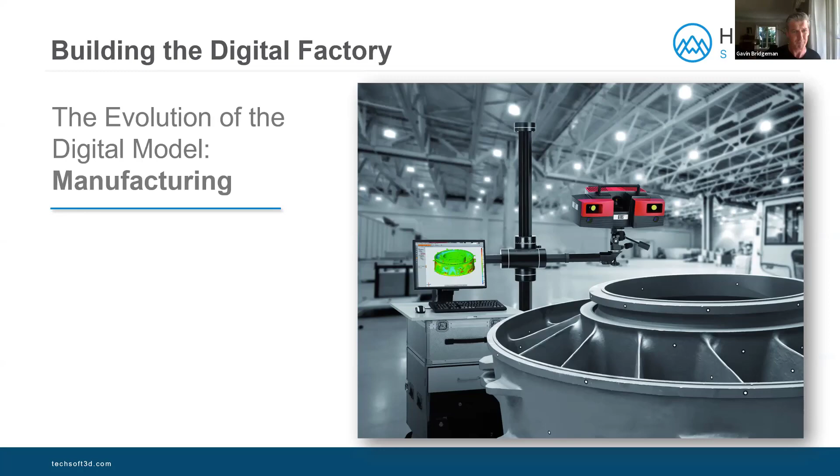If we look at that same trend in the construction space, it was the same idea. Initially, in the construction space, they really looked to engineering software to help facilitate design. It's a little different in the construction space, where in the manufacturing space you're generally pushing more and more towards automation, and you have less and less people involved in the creation of something, so there was a lot more software involved on the manufacturing side.

When you move over to construction, it's a little different, and that's really where a lot of the savings is, because by and large you have people on construction sites building buildings. So a lot of the opportunity seen in the construction space was around quantity takeoff applications, scheduling software, and there was huge cost savings enabled by having a digital model, which required a further investment in the amount of information they put into their digital model.

And we're going to have Luli Lee talk a little about what Fieldwire does, and she'll show you an application that is exactly designed at that, reducing costs by leveraging the digital assets.

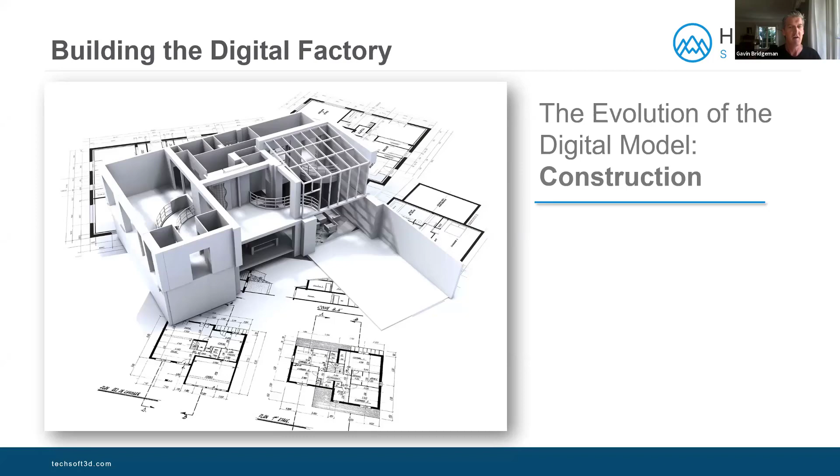So I think as we look at those two markets and the evolution of them and the opportunity that's being created by an investment in the digital model, we believe the digital factory is the next frontier on that front, and that there is massive opportunity for our community within this digital factory.

So I want to start off by defining what the digital factory is, and then I'm going to talk about a couple of the challenges in this space, some of which are problems that we're trying to solve, and some of which are ultimately up for our industry to solve.

What the digital factory is really about is, first of all, we have these digital assets, and your building is designed in Revit, and these industrial machines that live within the factory are designed in typically an industrial design application like SolidWorks or NX or CATIA, and it's about bringing those things together.

Then it's about connecting IoT devices that can bring those things alive, and then you have that data augmented with other information. Some of it can be 3D scanning information, some of it can be inventory information, and it's about all this digital information coming together to create an intelligent factory.

As data moves into the digital domain, it opens that data up to the power of algorithms, the scalability of computing, and that's where the real opportunity starts arising. So as this domain gets fully digitized, there's massive opportunity being created.

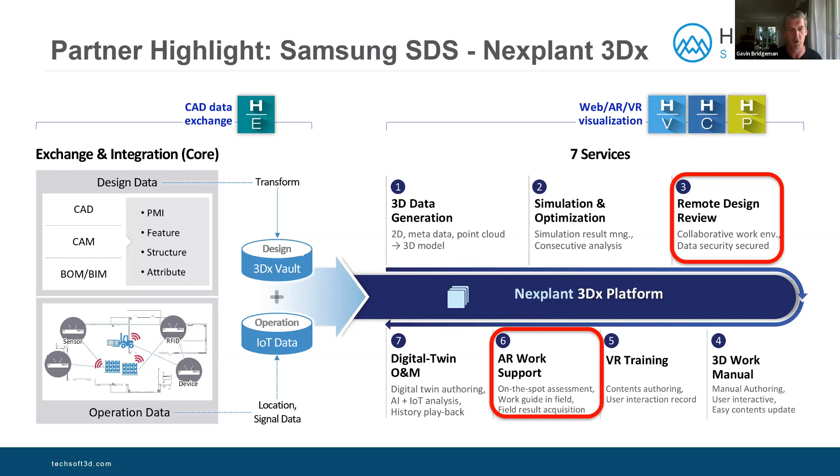There are some real challenges around how you can solve alignment issues and have a digital asset be put into the physical world and have it line up correctly. So those have been two of the interesting parts of working on that project, and it's a really exciting project for us as a company, and certainly has fueled a lot of our insights and excitement around this area.

So I'm going to highlight, since this is a topical discussion, two of the main areas we see as the difficult problems when we talk about the digital factory. The first one is just creating your digital factory. Just creating a 3D model that brings together construction data and manufacturing data comes with its challenges.

The great thing is that because of the investments the construction and manufacturing world have been making, they've solved a lot of the problems of having 3D representations of their models. They have every part modeled down to an individual case. You can't do a quantity takeoff application if you don't have every door and every window modeled. You can't build a digital twin if you don't have your industrial machines with the ability to connect to IoT sensors. So being able to bring this existing work that both the construction and manufacturing world have invested in their 3D models enables this to happen.

But still you do have these disparate worlds. The manufacturing and construction worlds tend to be independent worlds, and while there's a lot of similarities in the data, bringing those two things together presents its own challenges. That's why in the last two to three years, historically we've always had a strong set of technology around bringing in manufacturing data.

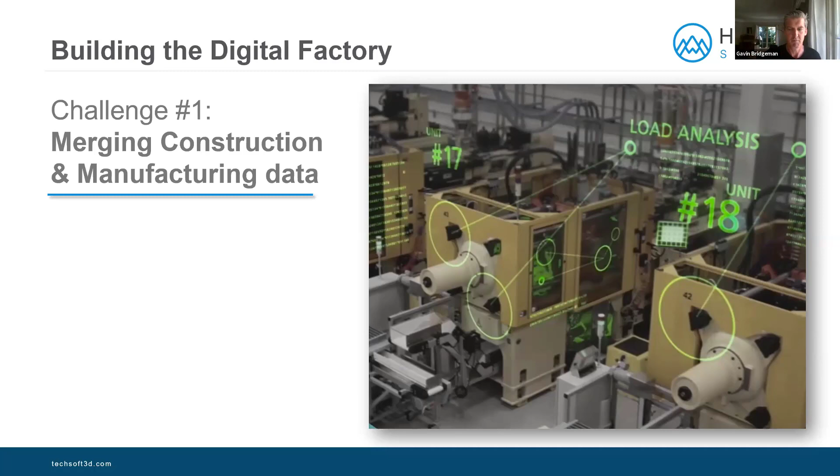The second thing I wanted to talk about, and I was trying to think of how I would describe this series of challenges, the best I could do was talk about this idea of getting from a dream to reality with these new technologies.

What I mean by that is, let's take for example IoT. This concept of having sensors on devices and wirelessly transmitting back information in a secure way to a centralized location is incredible, and the truth is that's the reality today. That does happen. So you have the digital twin that exists today and has been in use in the industry today. The challenge there involves connecting the IoT device back to the digital asset.

Sometimes that's easy when it's simply a location, and that might be the case for temperature sensors or these kinds of sensors in a digital factory. When you get to a specific sensor attached to a particular device that maybe has movement attached to it, that can be a little complicated, and that requires you to connect into the engineering model at a low level. The nice thing about working with engineering data is that you have that granularity where you can make that connection. So from an IoT perspective, actually bringing the factory to life is not a difficult thing to do. If you have the digital factory, it's fairly easy to connect IoT data to your devices, and we work with many partners that do that today.

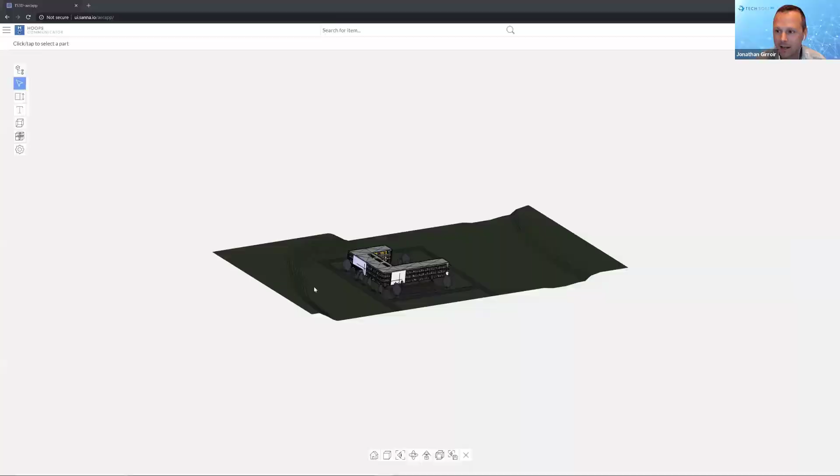I'm going to hand things over to Jonathan now, and he'll show some demonstrations of this technology in action. Great, thanks Gavin. So let's take a look at this and how we're enabling these types of workflows using our technology.

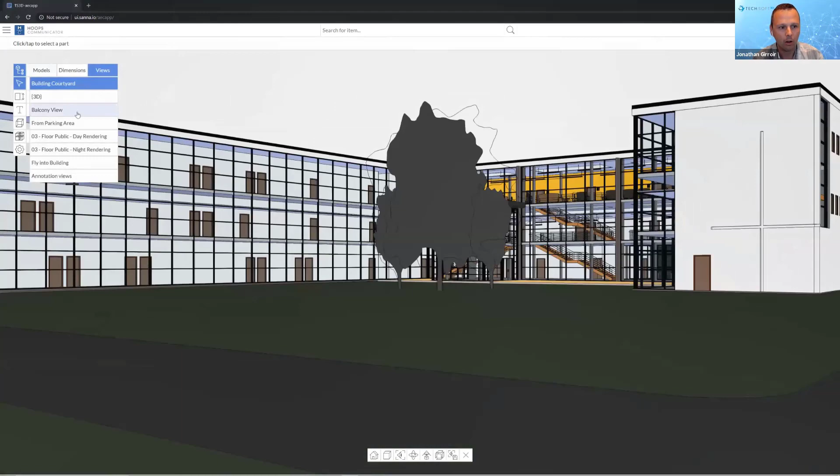Hoops Exchange here has brought in some CAD data from a Revit file. We're able to visualize it now in a thin web viewer using Hoops Communicator. All the views that were originally in that Revit file can be enabled here. You can create custom views using Hoops Communicator.

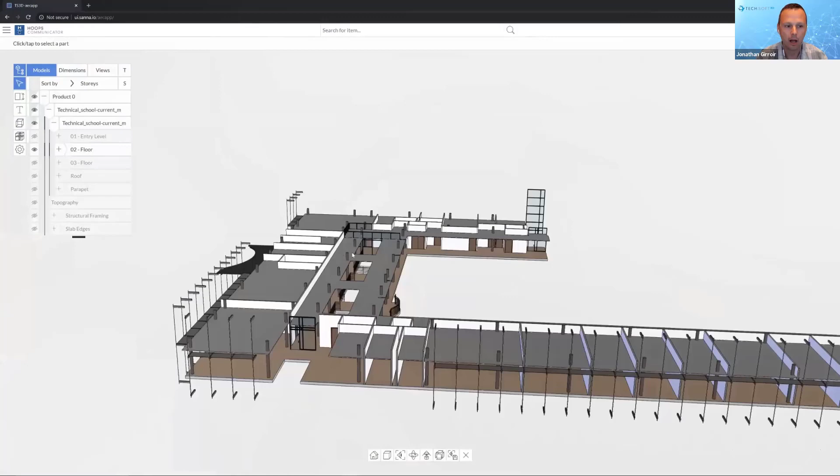But what we want to showcase is not just our ability to bring in CAD data, but link it with other types of frameworks or databases. So this is showing you how to slice and dice data. All of the data has been pre-processed using a BIM connector engine from Sanna.io, one of our partners and a component provider as well. So I can view this by floor.

We just saw the second floor, or by category, which is a paradigm here in construction data. I can turn off everything and turn on, let's say, walls, the curtain panels, and structural columns. So depending on how my data is organized, I can now change the 3D view.

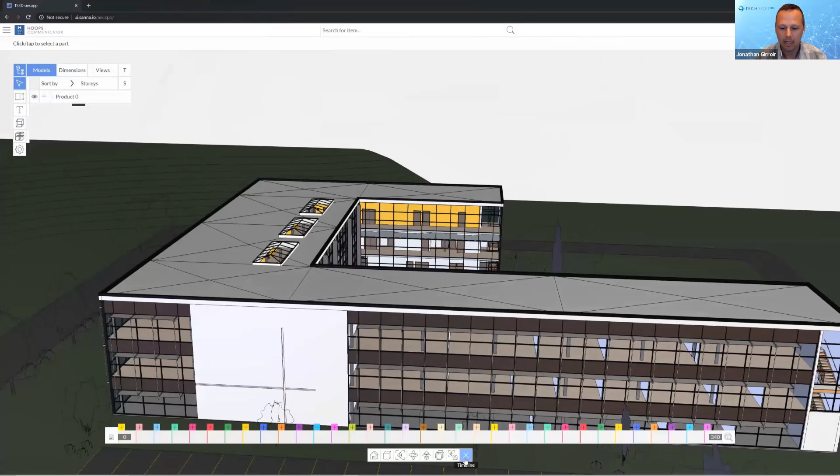We're going to go back to our floor view, and another way we can overlay additional data is through, let's say, a construction timeline. So here, starting from day 0, I can go to different snapshots of how this is going to be built over time, and again, enact or show what's happening in 3D and what I should expect at those particular milestones.

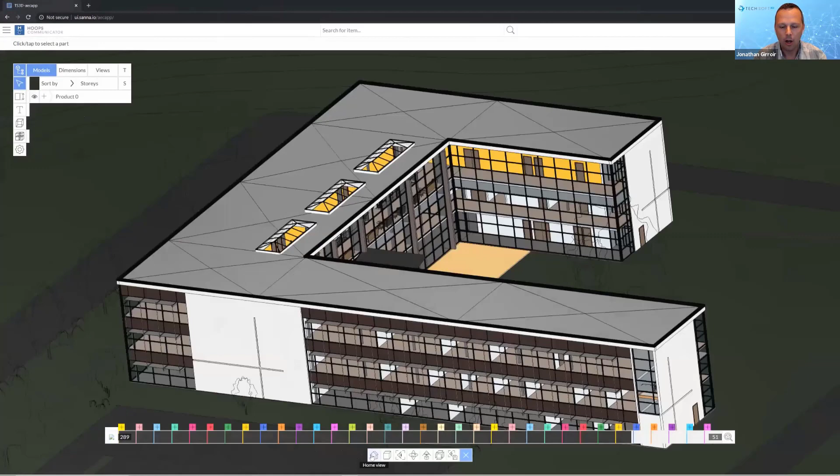Another very challenging problem that Sanna has solved, or is working on, is connecting 3D data with 2D data. So here we have really a federated model. We've been able to read in the DWG data for the floors as well as a 2D plan, like Gavin was talking about, and connect it together.

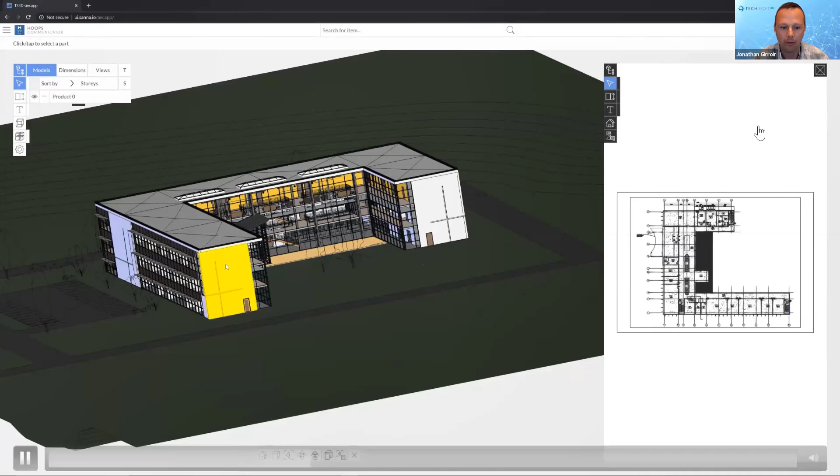And Sanna has gone through and organized this data and created a data backend that allows me to do things like link together selection of a wall in 3D and the wall in 2D, or this shade support in 2D, and be able to display it here in 3D. And that's not an easy problem to solve. So being able to show this is really exciting.

There's also a federated search. So bringing all of this data together and additional data, we can now search for things like, let's say, walls. And we have different suggestions as well. We're searching in the category section, but we can show, let's say, all the walls on the first floor.

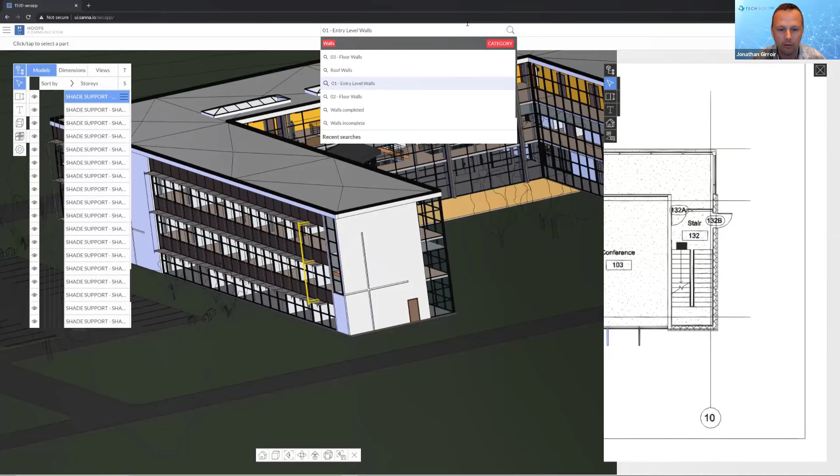And that gives us a list that we can now step through and again, be able to display it not just in 3D, but in 2D, and have it zoom exactly to that location, and be able to display it up here in the model browser as well as we walk through each of those elements. And so now we're overlaying a data model on top of your 3D and your 2D data.

We can do some very interesting things like search, in this case, for doors, but maybe I'm not interested in the categories - this data can also be organized by family. What's really interesting is there's no door text in the object name, but the Sanna BIM connector has allowed us to classify objects in this family and recognize they're doors, enabling this intelligent search mechanism.

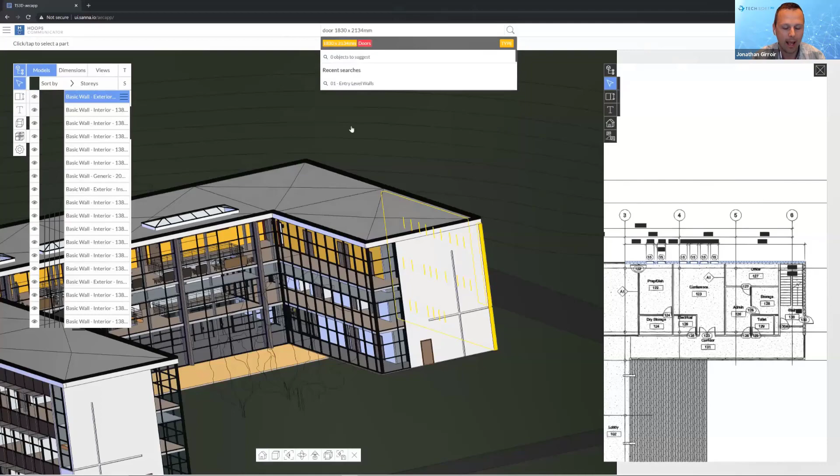Again, we can change the way our 3D data is displayed with these filters. That's Hoops Communicator being able to do that in a graphical way, and Hoops Exchange providing all of this data for visualization.

So here's some classic building and construction data, being able to walk you through different views and bring it all together. It's all being skinned in a custom UI - that's something up to you. We don't enforce any specific UI. What we do is provide you with all the data and this 3D and 2D rendering.

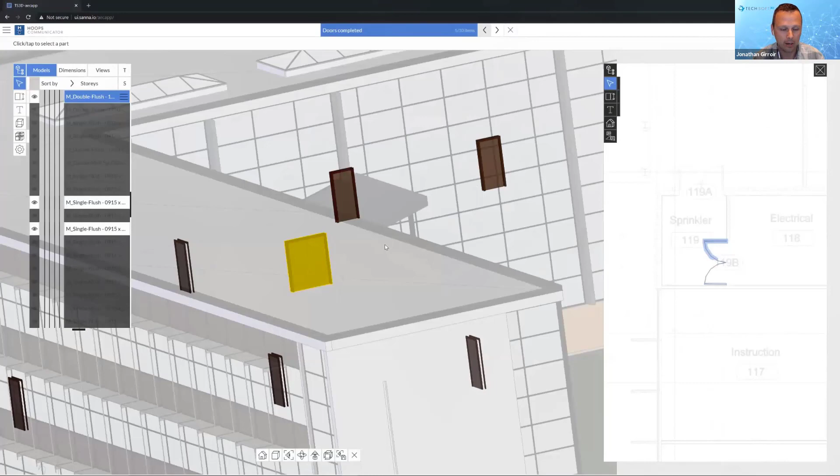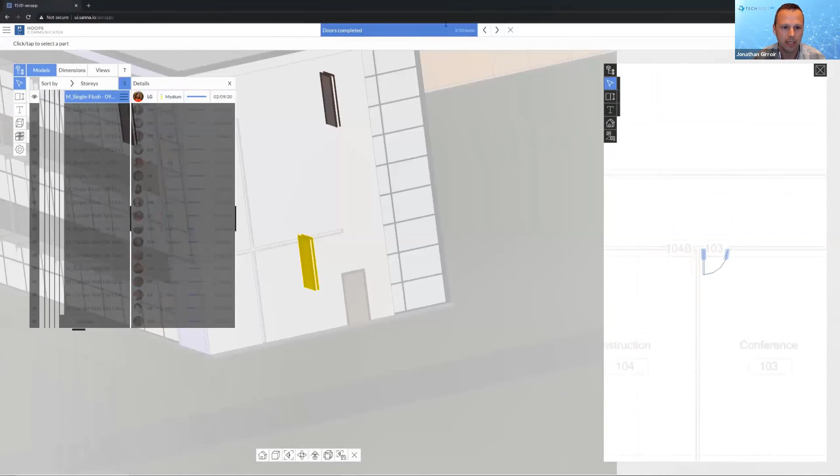We can do other things like look at priority, or the owner of particular objects, look at different Gantt charts, or what's been completed as part of this project at a particular time point, or who owns a particular set of objects, and filter that way. So just a lot of different views into your 3D data, giving you more than just a dumb model, but being able to navigate it in all these different ways.

The next thing we want to show is - maybe Gavin, you can move on to the next one.

You mentioned bringing a factory to life, and so here's a demo looking at a dashboard for a fictitious digital factory, bringing in IoT data, consumption, energy consumption, as well as environmental information about humidity and temperature in the factory. But what we really want to do is bring this to life using 3D data.

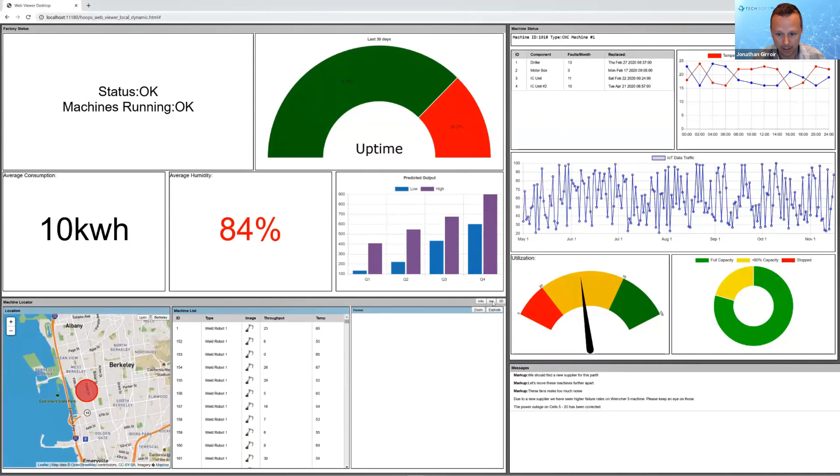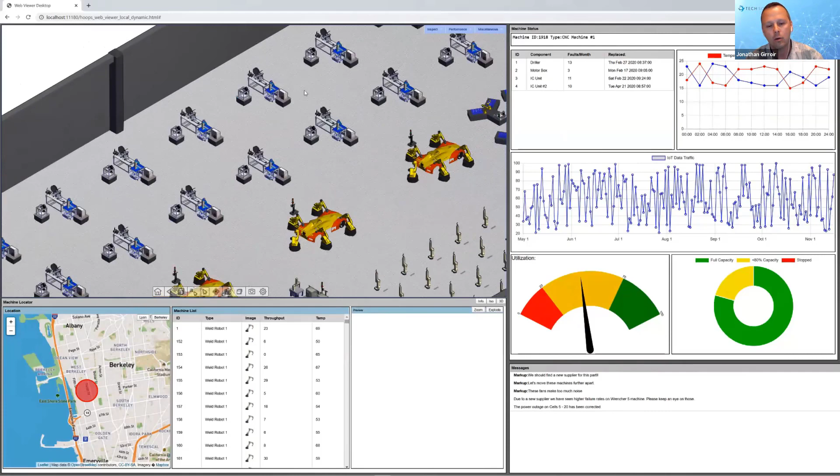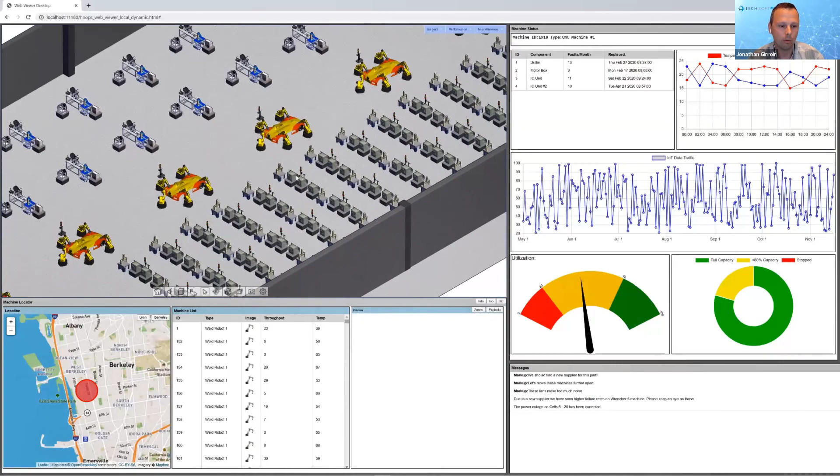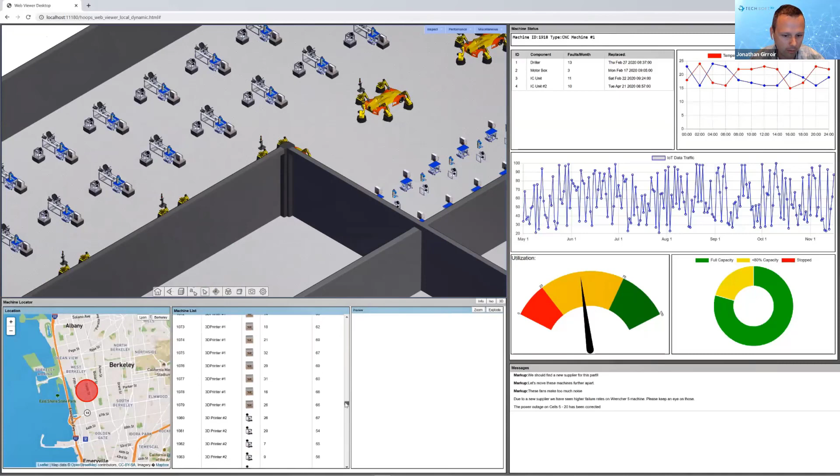We have a list of all our couple hundred different robots, tools and machines in this space, and we can go to that in our list and zoom into the 3D factory where that's located. In fact, we've also added animation to that.

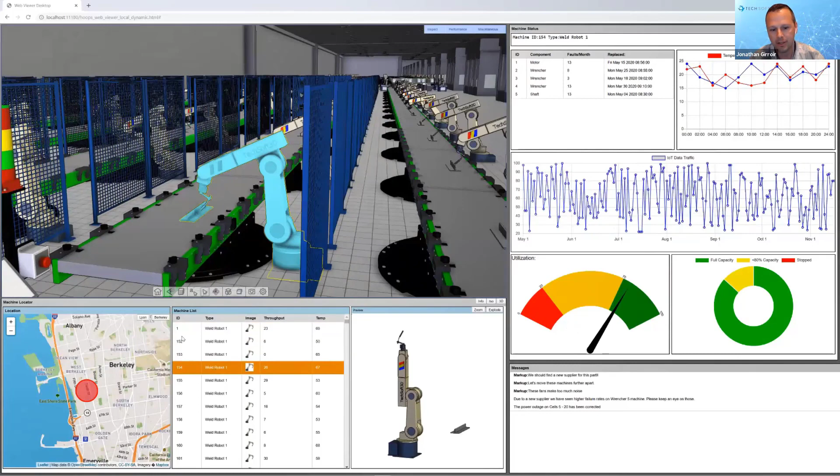This is something we're working on across all our visualization products - adding animation. We can step through each of these different machines and walk down the line, or blow it up and look at our full 3D view, because that's what we might be interested in.

But again, we want to bring this to life, so we want to overlay additional information. Let's say we want to showcase all the problematic machines - which of these have a significant amount of downtime or fault errors, and can I see that in 3D?

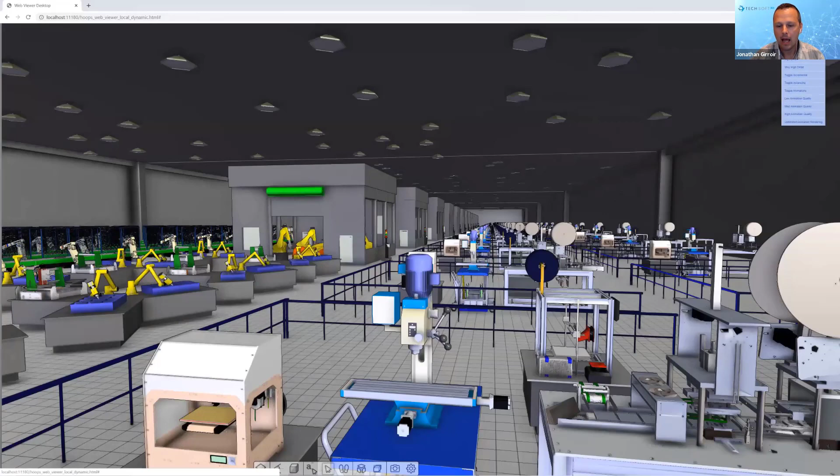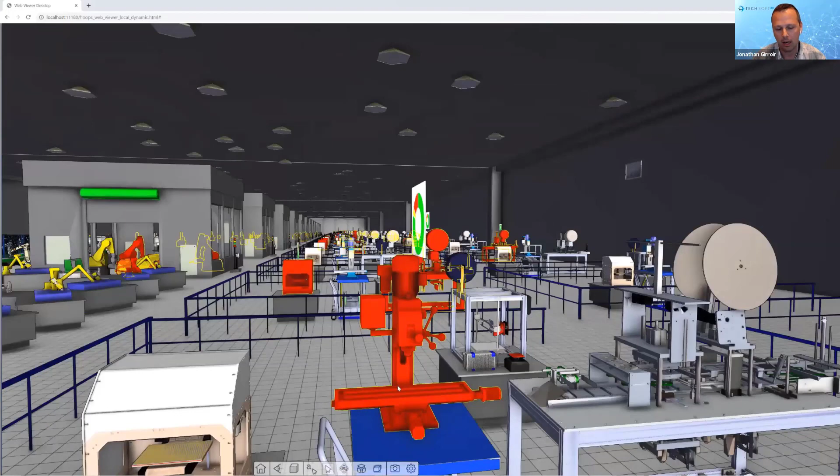The next thing you'll see is our ability to show problem machines, all highlighted here in our 3D view, soon populating with little icons or charts above each machine showing exactly what's going on at a quick glance. I can troubleshoot that, procure maintenance records, or load that 3D model to troubleshoot it as well.

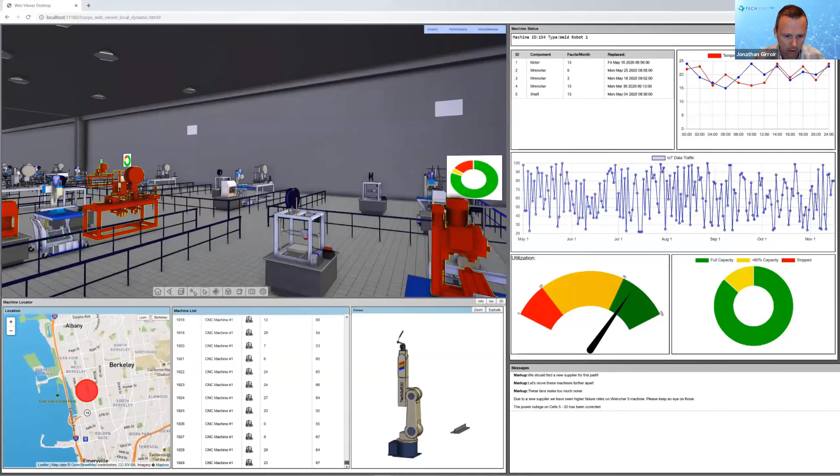So let's exit our 3D view and look at a few other things. We're going to go down our list of machines and bring up a CNC machine. You'll notice we zoom into our 3D view, but also here in our preview, we bring in the entire 3D model.

We've done a number of performance tuning efforts to load low fidelity models in the main factory and high fidelity models here in the preview, pushing them back and forth as well. So if I want to troubleshoot in the main 3D model, I can do that by loading the entire model.

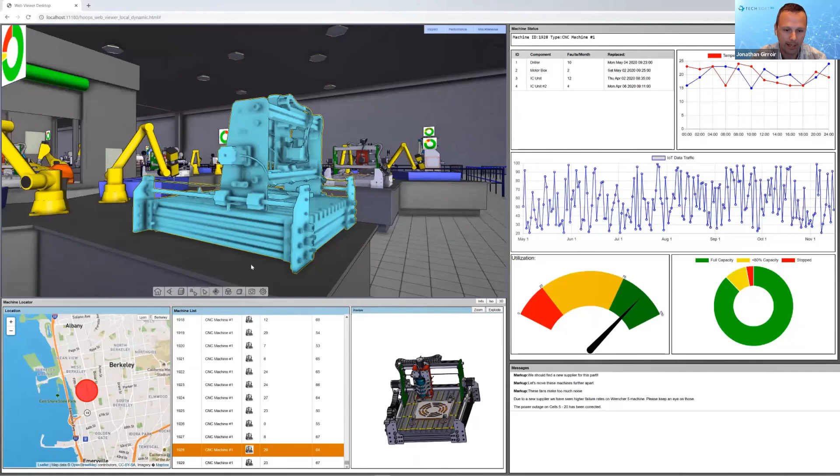Because we have the whole mechanical assembly, we have a bill of materials, or a filtered bill of materials, up here on the right. Each of the units that may be attached to some IoT sensor providing information, we can present that in our preview view.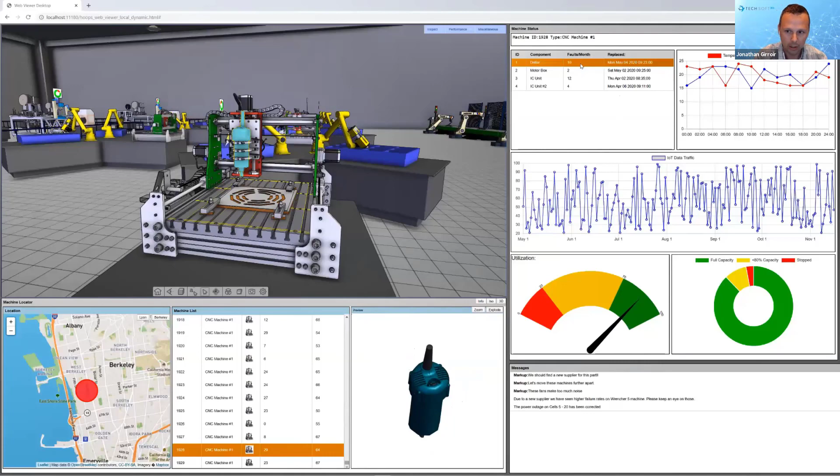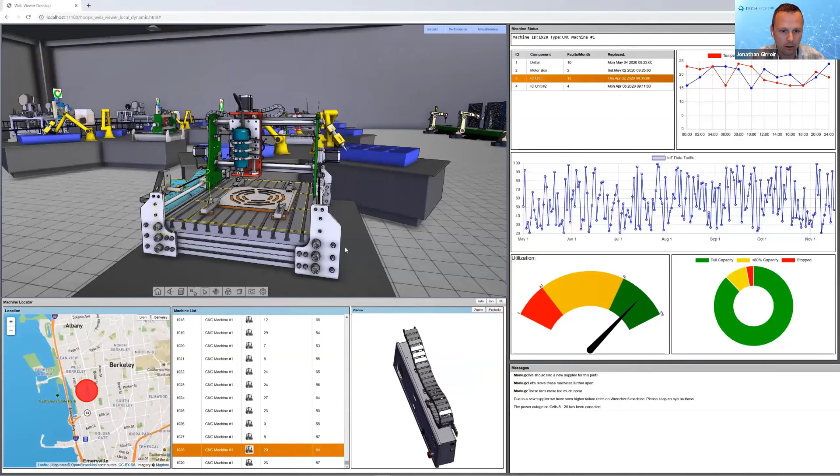Let's say this drill or the motor, we can now bring in additional information from, let's say, the number of faults or when it was last replaced, and further drill down into this data-rich model, both 3D and IoT data or data from a database.

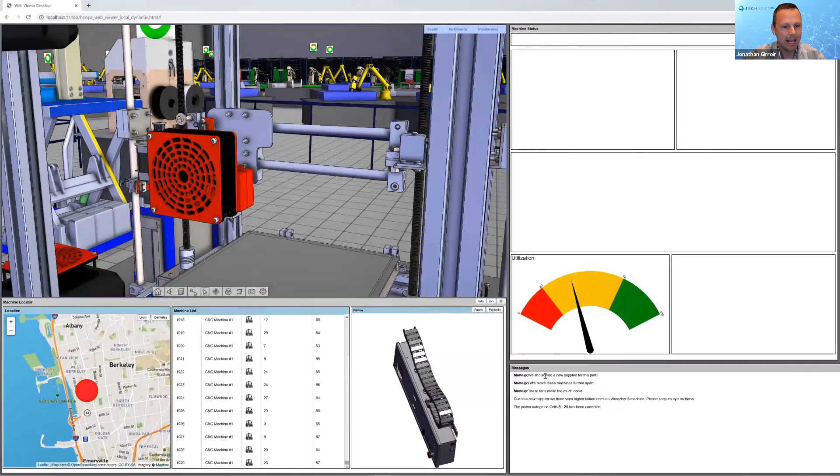Another thing we might want to do is walk through different messages that technicians have annotated. So here we're looking at a machine. We need to find a different supplier for this part. We're going to load the full machine to get our full context, and again this is modeled down to the individual panel or individual bolt with high fidelity information. So we're able to switch between fast animation and walking through this factory to really drilling down and getting these rich 3D models.

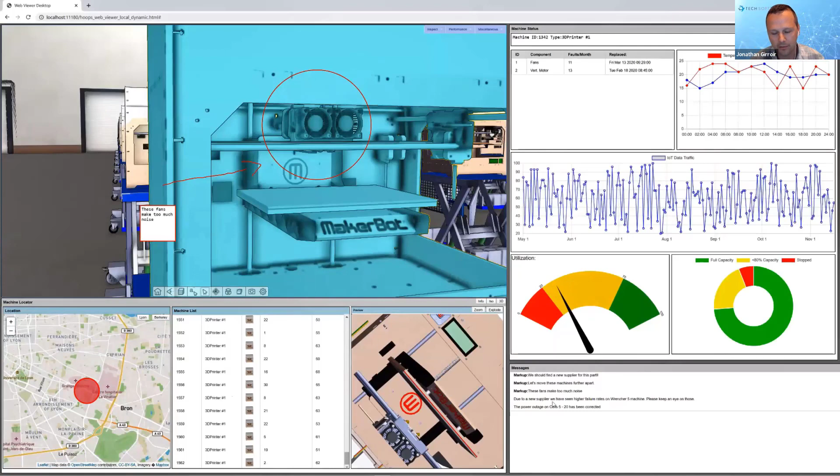Here, another one, we have a 3D printer. And in this case, maybe we need to replace this fan. Is it too loud? And we can display additional information there as well.

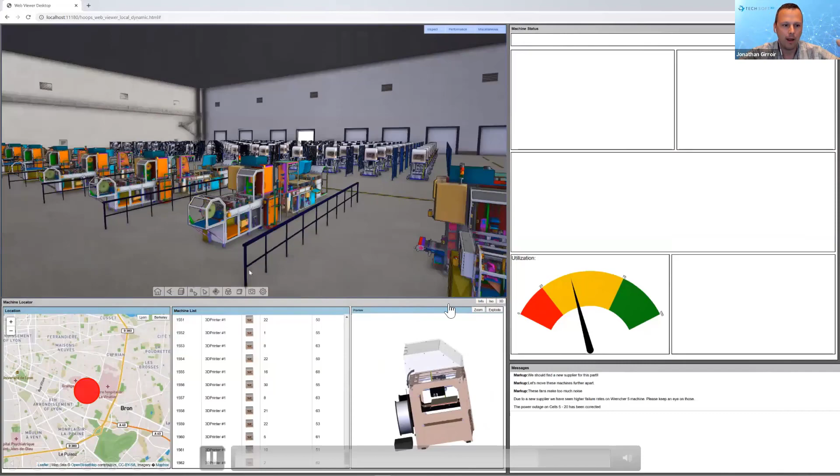But this is a dynamic environment. It's a dashboard. So if I was in our California factory, I could also swap to our French factory. And here we just loaded dynamically our building and what's in the building. So we have the walls, staircases, lights, overhead doors. But here we have a number of different pieces of machinery. It looks like an army of 3D printers, but then also we have a significantly detailed model that we can load in here as well.

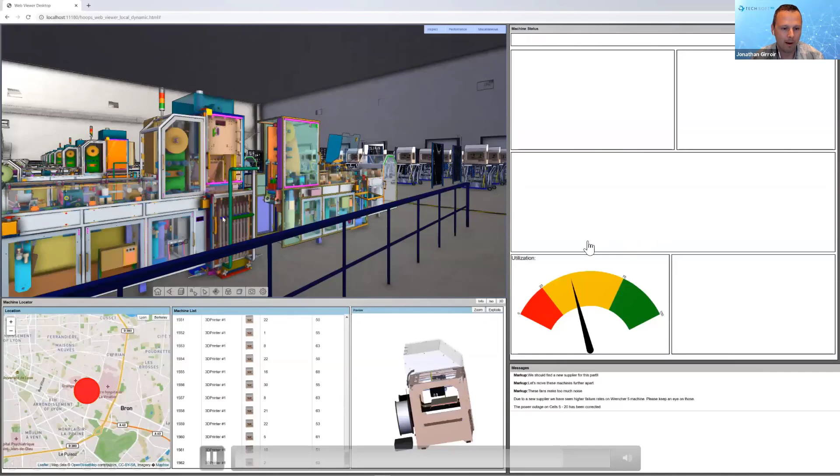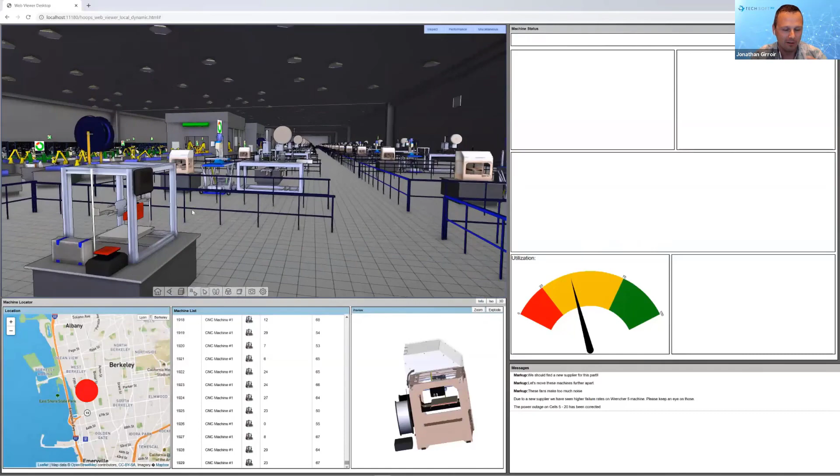This has over 40,000 parts and hundreds of thousands of triangles. I remember when we first were working with this data, just loading this one machine was really impressive. Now we can load multiple copies of this machine and visualize it. The same thing is I can swap back and forth between Lyon, the French office, and our California site. So just a lot of different stuff going on there, being able to navigate your 3D data and augment it with real-time data from anywhere, IoT sensors or databases or bill of materials. So really creating these rich 3D environments.

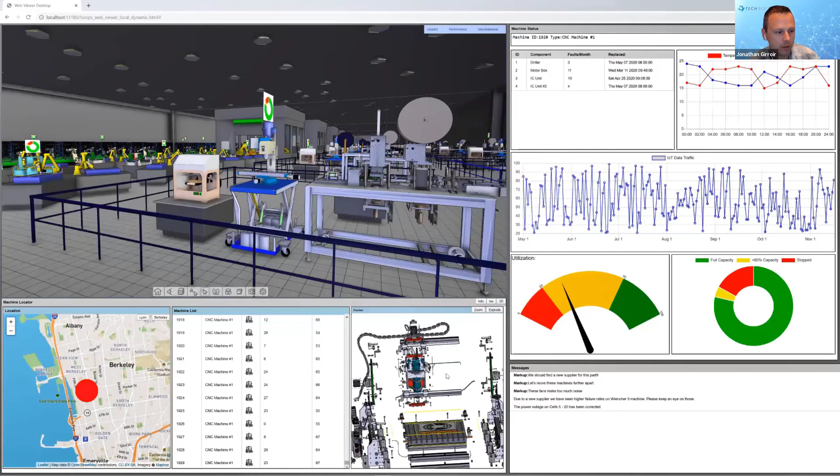And so the last thing we want to show, Gavin was talking about it, is we've been looking at the web, but what are we doing for desktop and mobile? So using HOOPS Visualize, which is our graphics engine for desktop and mobile, we're going to show the combination of a streaming database of 3D assets and being able to show that in a native application. So this is a C++ application running on a desktop.

We need to connect to a server. I'm going to connect to a server running locally on my machine, but this could be off on the Azure or AWS cloud. And I want to load a large model. We're not loading this from a file, but it's kind of like a streaming set of files. We're going to load a Boeing 777, so it's a 30 gigabyte CATIA data set.

We're also going to clamp the memory because on, let's say, mobile devices, we don't have all of the graphical resources we might have on a desktop machine. And now we're going to pull in some metadata and start the server. It's going to start streaming in data. So this is like our back-end web server streaming data to a local client, and we're going to clamp it to use a certain amount of resources.

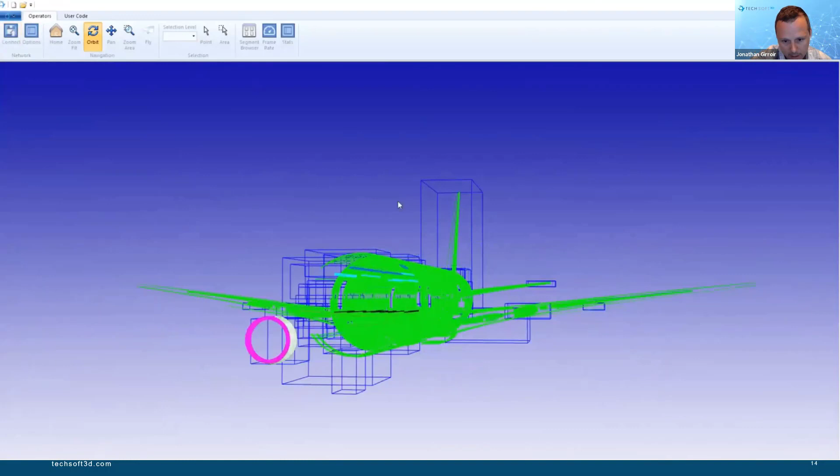So what you're going to start to see are these blue bounding boxes, and that's where we're going to start loading data in. And once we hit that limit, and it could be limitless, but once we hit that limit, we're going to stop streaming data in and allow you to see these large objects. And so once those boxes go away, we've reached the stable state.

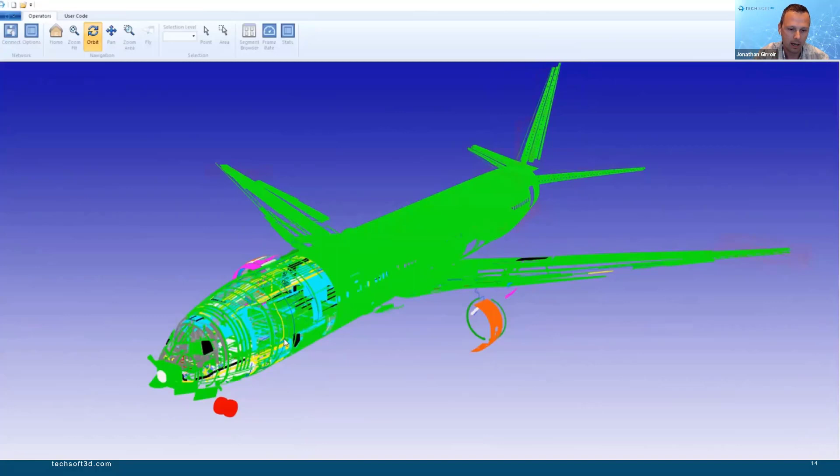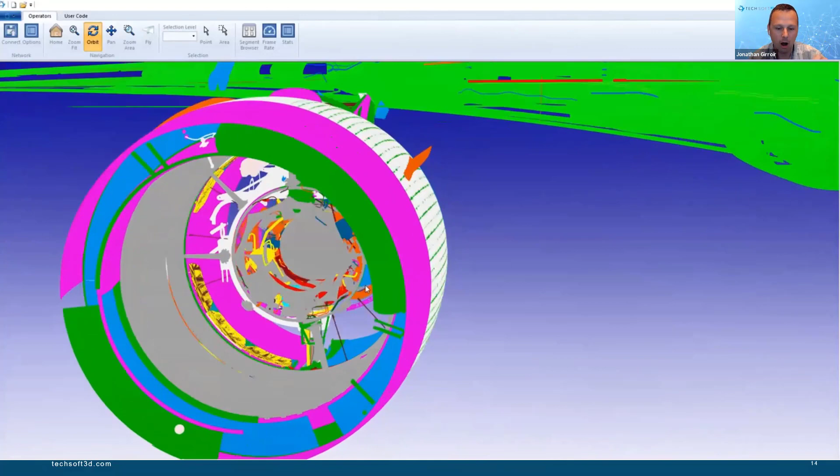But the next thing we may want to do is drill down into some more detailed data. So we're going to rotate this Boeing and look at the turbine engine and zoom in to try to load in specific detail for this region, offloading other data. So we're able to load this in dynamically, offload other data, and still be able to maintain that memory cap. As we zoom back out, that detailed information will be offloaded. You'll see some red bounding boxes where we're going to be filling data in.

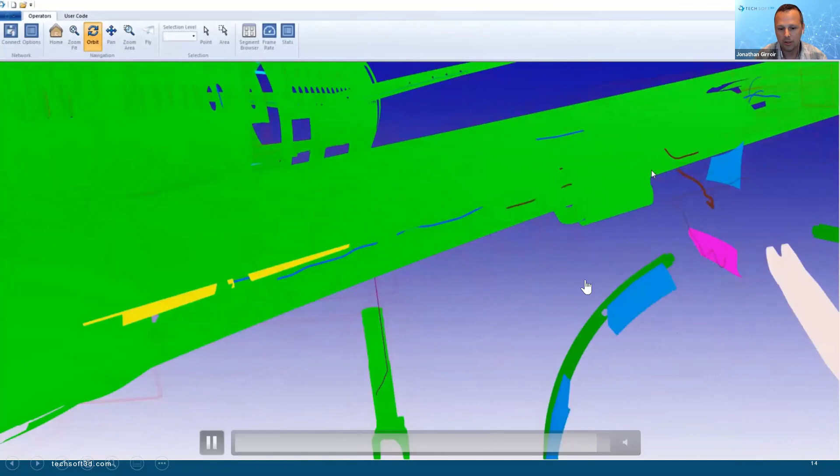And this is coming up in some of our future releases of Hoops Visualize. We're really excited to have this scaling technology across all of our products. So those are the demos. I want to hand it back to Gavin. He's going to talk about some opportunities in this space for developing applications and working together.

Thank you, Jonathan. I'm always impressed that you can talk that through so well. Thank you for that. So I'm going to quickly wrap things up and then hand things over to Looly, and she can talk through her presentation, which has got some really interesting stuff in there.

Hopefully the discussion we've had today has piqued some interest. If you're an existing partner of ours that doesn't necessarily work in the digital factory, hopefully you've heard enough today to pique your interest and think about what you could do. There's certainly a lot of interesting problems to solve in this space, or maybe just adapt your technology to make it more useful in the digital factory.

If you are a partner in this digital factory space, we really appreciate the collaboration we've been having with you. Hopefully you're seeing the investments we're putting into this area, and we'd like to communicate about it. While we feel we're in the right direction, we're certainly always open to listening to what you say and iterating and moving to meet your needs.

And finally, if you are just a new developer trying to understand this engineering software world, Jonathan talked a little bit about that at the start. It's very easy to get access to our tools. We have some targeted at web developers, some targeted at C++ developers, and we'd be more than happy to get those tools in your hands and let you start seeing how easy it is to build solutions for the engineering software market.

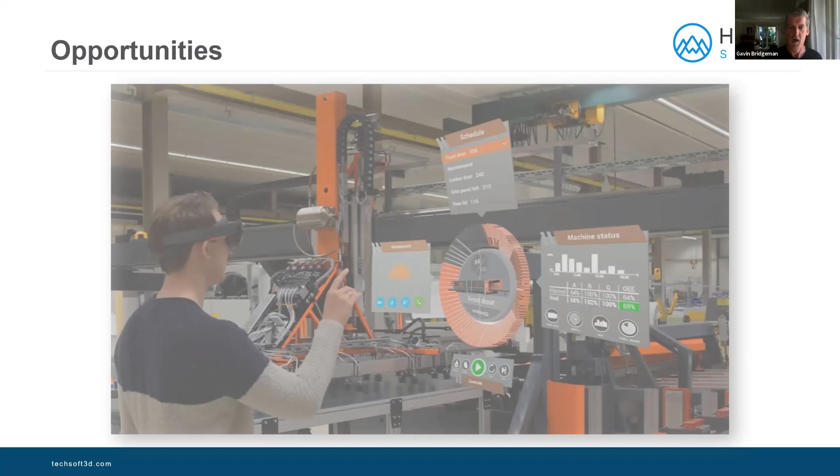So, Gavin, one question came in, and please feel free to populate the chat with any other questions you may have. We'll answer them now or later. Do you support point clouds?

Yes, so we do support point clouds. When we generally talk about supporting a format, there are two parts to it. The first is being able to read the data. Point clouds, fortunately, are very simple — generally a location, and occasionally a color with them. We do support a couple of formats, including PTS, PTX, and some of the Leica formats. The second part, which is actually where the problem lives, is supporting the size of these models. Some of these point clouds are hundreds of millions of individual points, and you can't support them without what we call out-of-core rendering, meaning you don't load the whole model in, but make decisions about the objects that are relevant based on your spatial location.

We support that in our client-server technology that Jonathan was just showing a second ago — that same idea of setting a memory limit and only loading in, let's say, 1 million points, but making sure they're the most important 1 million points. The second part is, when you come to point clouds, it's a point — an infinitely small object. Generally, when you want to look at point clouds, as you get closer to objects, you want some kind of volumetric element to them, and there's a widely used technique called splat rendering, which we support. So yes, we do support point clouds, and we think that's important in this digital factory, where you might have the digital assets representing the as-designed object, and then the scanning comes in to actually show what it's like in the real world.

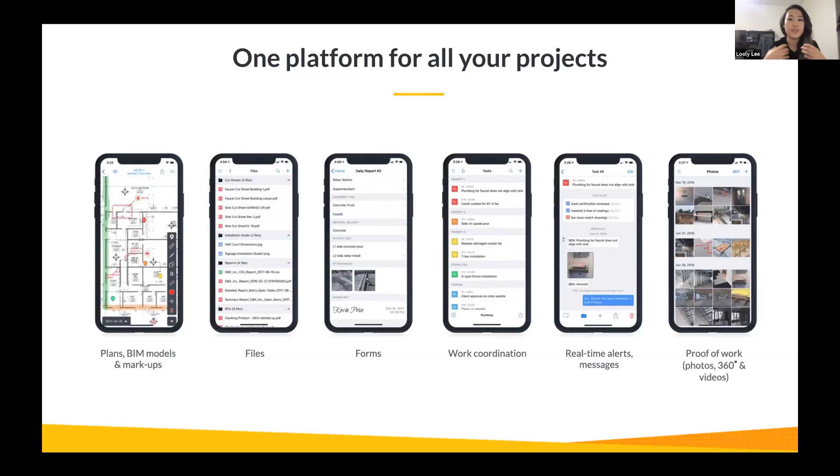We also support 2D photos as well as 360 photos and videos. Our venture into supporting 3D formats is relatively new, it actually just launched earlier this year. Back when we were evaluating how we were going to support our customers' growing needs for that 3D information, as you guys know, more and more projects are starting to use BIM, so we wanted to support our customers doing that as well.

So we had a couple of requirements from our users that helped us get into a partnership with TechSoft 3D. One of which was we needed something really high quality and polished, something a superintendent could easily use and not give up right away, because once you lose the confidence of a superintendent or somebody in the field, it's really hard to gain that back.

We also had requirements that the BIM support needed to be on web and mobile. Specifically on mobile, we needed offline capabilities. A lot of our project sites, when they get started up, don't have a Wi-Fi connection, there's no LTE or 3G in those areas when projects are just coming off the ground. So we wanted something with offline support, as well as support for classic BIM formats. Some of the other 3D viewers or SDKs out there are really more for either manufacturing or 3D graphics for movies or 3D printing. We needed specific support for BIM formats.

Additional value adds we got once we started working with TechSoft is really how easily customizable the UI and UX is. While the technology is really great, we wanted to build a little bit on top of that to make sure navigation, viewing, ease of use all matched Fieldwire's current branding, and that it was really part of our app rather than off to the side. I was also really impressed with the partnership and transparency that the guys over at TechSoft offered us, working through issues and problems together. So all those requirements plus the additional value adds, it just made sense to go forward with this project.

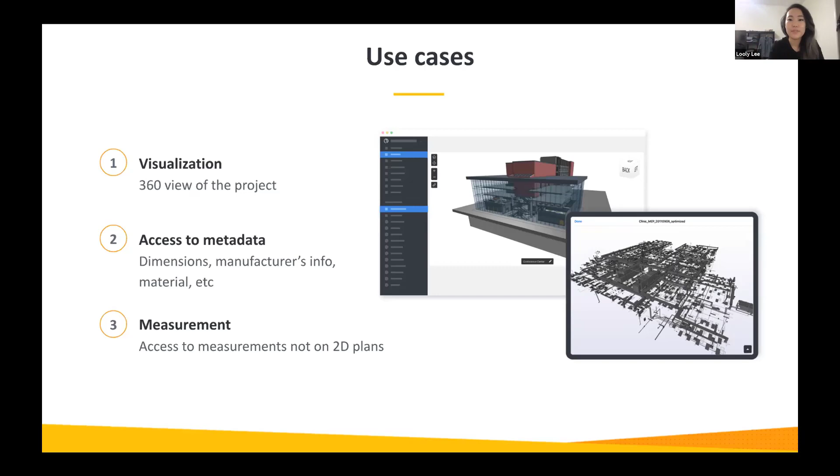So with that, I'm gonna just show you guys what our application looks like. So when you're in a 3D project in Fieldwire, this is what you'll see. So I have a model open here.

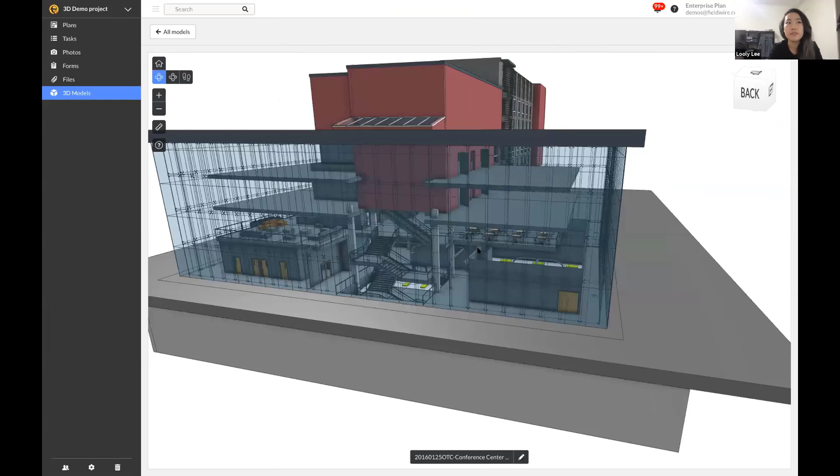We have two different types of navigation modes because we want to support two different types of workflows. So for some users, like specifically manufacturing and stuff, you want to be able to rotate the model in sort of an orbit view when you're on the outside of things.

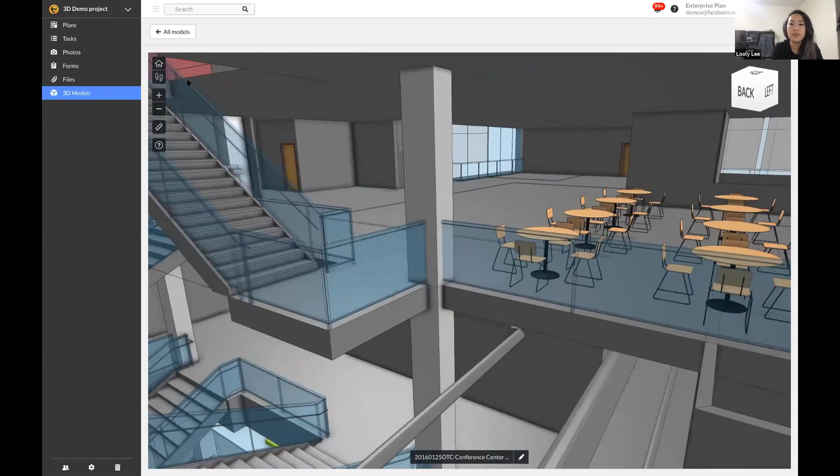But as you get inside the building, for more commercial buildings it's easier to navigate in a point of view mode, kind of like a video game, so you get more of a 360 context when you're actually inside the building, because rotate doesn't work as well as the point of view mode, which people are used to when they're walking their job site.

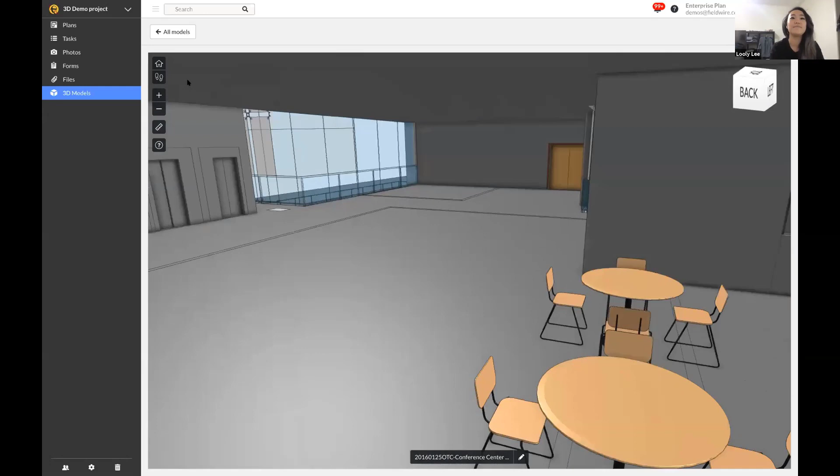So I've heard superintendents comparing this to like a digital job walk, which is really exciting. So those are the two different navigation modes.

If you click on any model element, that's where you'll get all the metadata and properties that can come with an IFC model. So as you can see, we not only get the IFC metadata, but we also get the Revit metadata as well.

And users really like being able to see everything that comes from the Revit model, but have that be accessible to them out in the field as well. So that works the same.

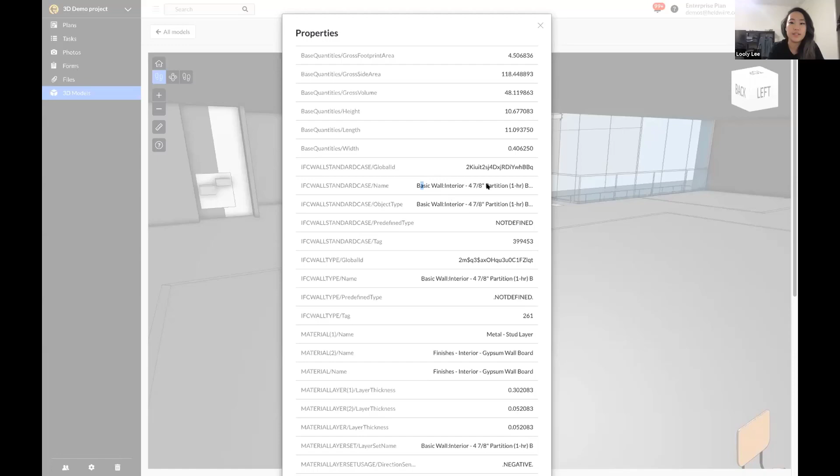So I can tell that this wall is an interior partition that's one hour rated. That information normally on 2D plans could be on separate plans - there would be a partition schedule, and then you'd have to look at two pieces of information at once to get that full picture.

But in this case, you can just click and see it. You can obviously control the visibility - we give users the ability to hide or isolate different model elements.

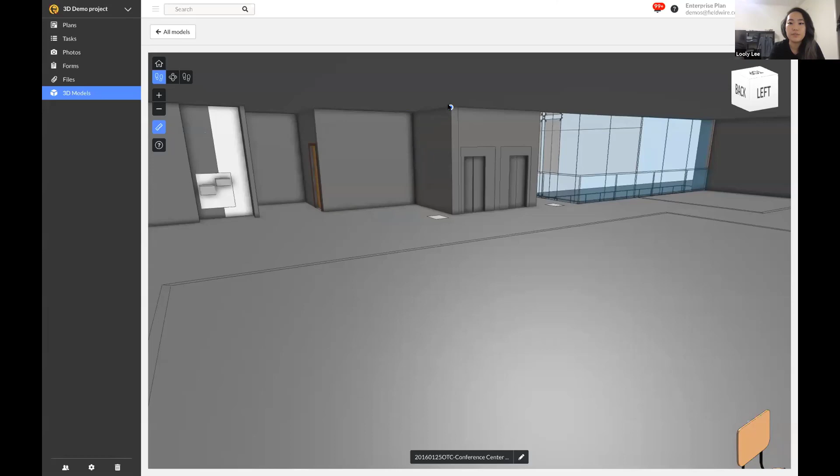And then we also give users the ability to measure points in the model. What I really like about this is that because we have all that BREP data, we're able to snap to edges and corners to get truly accurate measurements that might get lost in 2D plans sometimes.

Anybody who's done an estimate will know that sometimes you just can't get it to exactly snap to the edge if you're not using tools like Revit or AutoCAD. And this way, this is accessible to them outside of those traditional environments.

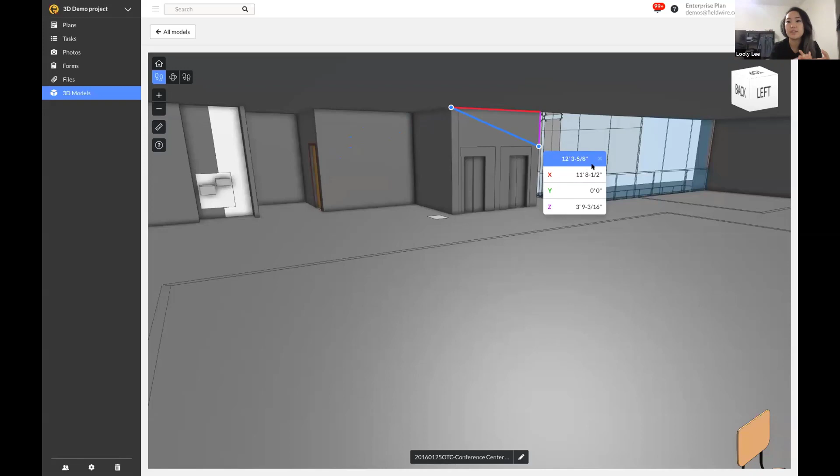And then you get the entire, not only the full distance, but all the XYZ coordinates as well. This is really useful, particularly for height, which again is not all available to you in sections on the 2D plan.

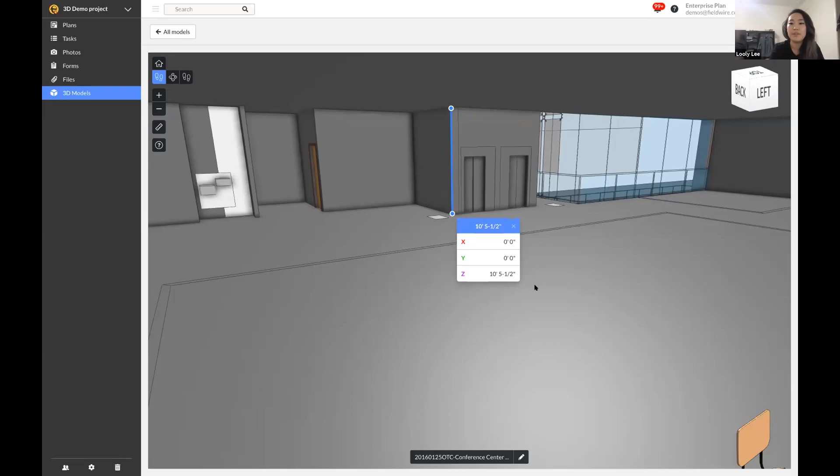And then we have the view cube on the right here, just for easy, quick navigation of the model for those who just want to get an outside view of it. So that's our web platform.

I do have my iPhone connected, so I just want to give a quick peek on what it looks like on mobile.

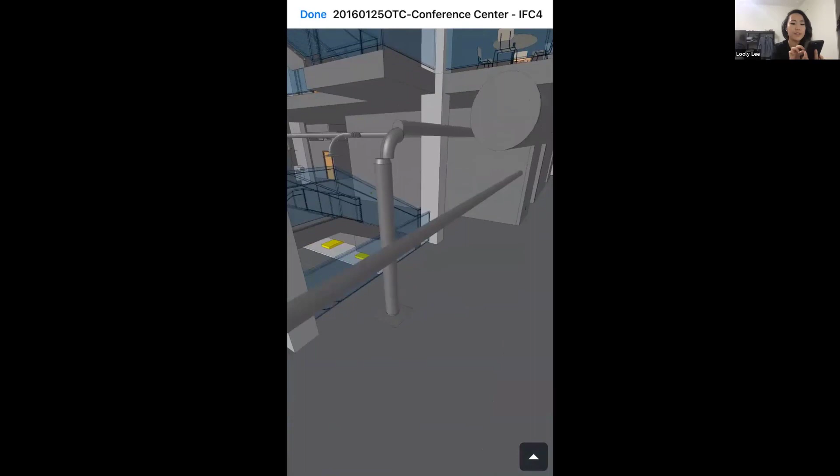Really similar functionality, but instead, the navigation is more gestural. I'm pinching, zooming, and panning with my fingers. But this is the real value, having the same model.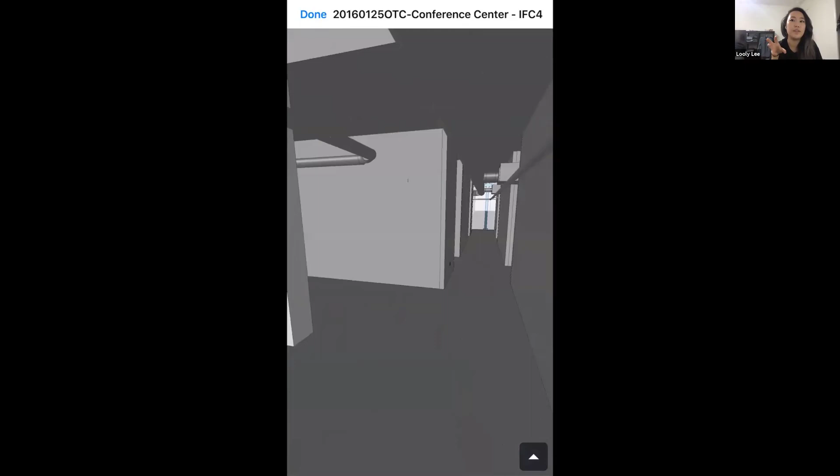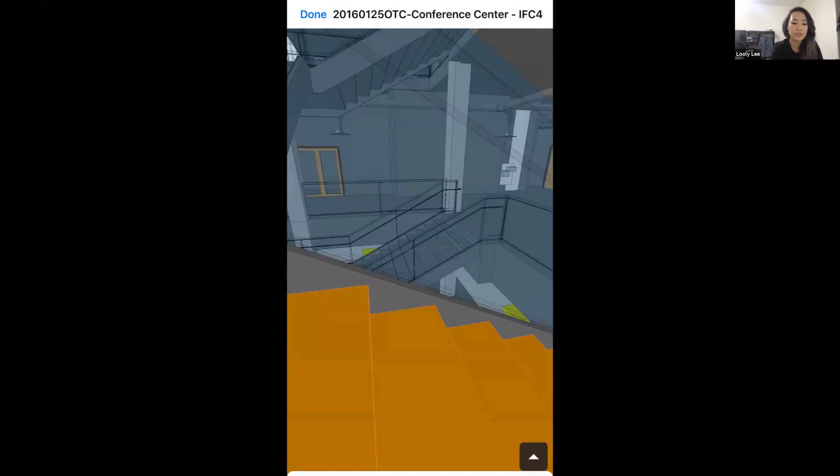A lot of times 3D models, while they're being more and more used on construction sites, are normally isolated to the trailer or the offices. It's not as accessible in the field. But now our customers have this in their back pocket, and they can quickly reference things, tap on model elements, and get those same properties they did on web. This is great for them to make more informed decisions while out in the field, but also just a quick reference instead of having to ask the question and maybe escalating it to an RFI. This kind of answers all those things for them.

Just a recap on the results, we had pretty aggressive GTM goals. We started talking to TechSoft back in late fall, and our BIM viewer launched earlier this year, January for web, and then February, March followed for Android and iOS. So it's a relatively recent partnership, but we've gotten a whole lot out of it.

Initial user interaction and feedback has been really, really positive, actually. People are impressed with how polished our product looks, especially since this is our MVP, and they just want more and more features now on top of it.

Some insight into some of the challenges ahead. One thing that's on the roadmap for this year is optimizing the mobile experience. I showed what it looks like on the iPhone, but one consideration is our user base, again, we're primarily for the field. So our primary users like superintendents and foremen sometimes don't have the latest and greatest devices. That's been a bit of a challenge supporting 3D, because it's a very memory intensive process. So for those larger models on big projects on older devices, it's been a challenge getting those to open. We're working on optimizing the mobile experience, and working with TechSoft on workarounds we can do in regards to that.

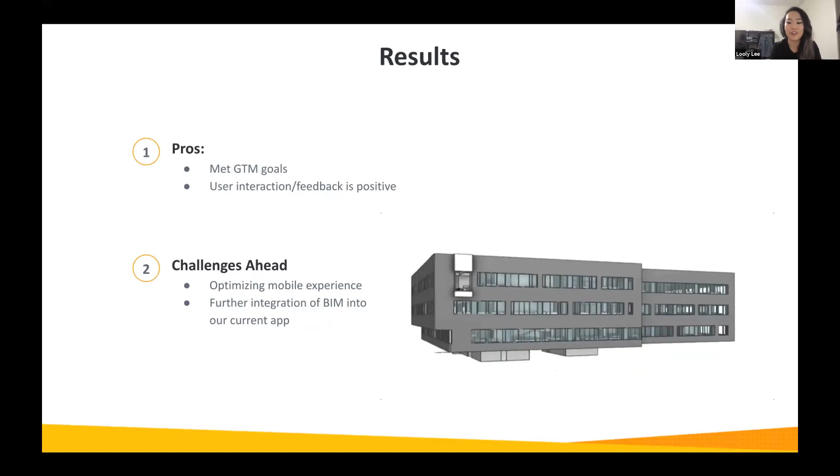So that's all I had. If anyone has any questions, happy to answer them.

Thank you, that was fantastic. We always love to see what our partners are doing and the innovation you're bringing to the field. Do you feel like that's a differentiator for Fieldwire, being able to have 3D at your customers' fingertips?

Well, I think there's a couple of different competitors that also offer 3D capabilities. I think the real value add is having 3D as an additional context to all those things, like robust task management. If you're doing your punch list and want to quickly reference a 3D element, or on your plans, and the RFI doesn't paint a clear enough picture because you can't visualize all the MEPs stacked together, it's more of a value add because we support all those things across the platform. And I think that's what the differentiator is. Some competitors are solely focused on BIM, some are solely focused on cloud sharing of documents, but we pride ourselves in supporting the full workflow of any field coordination need you may have.

Fantastic. Another question came in here. Do you anticipate supporting contextual information given the mobile devices? So I imagine, are you going to present your users with information if they're in this room or on this floor, kind of filter the data coming into them dependent on QR codes or GPS coordinates?